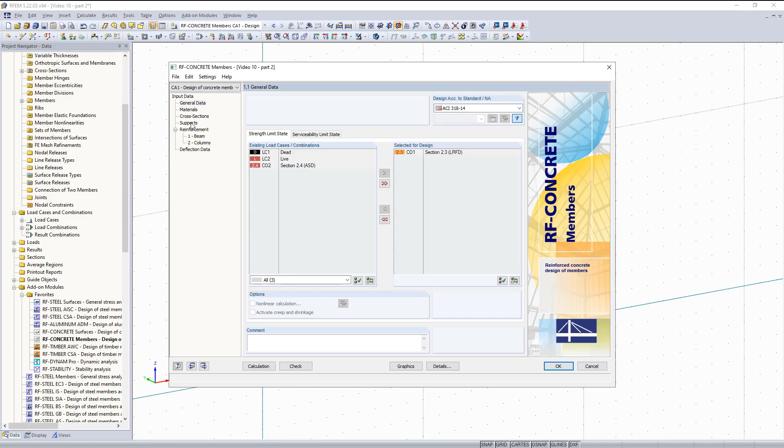Next, since we already entered all of the input data in the first part, we can proceed with calculating our reinforcement. Now all this calculation is doing is pulling the internal forces from RFEM into the add-on module and applying the ACI equations to give us our actual reinforcement layout details for each member. You can also see it solves pretty quickly.

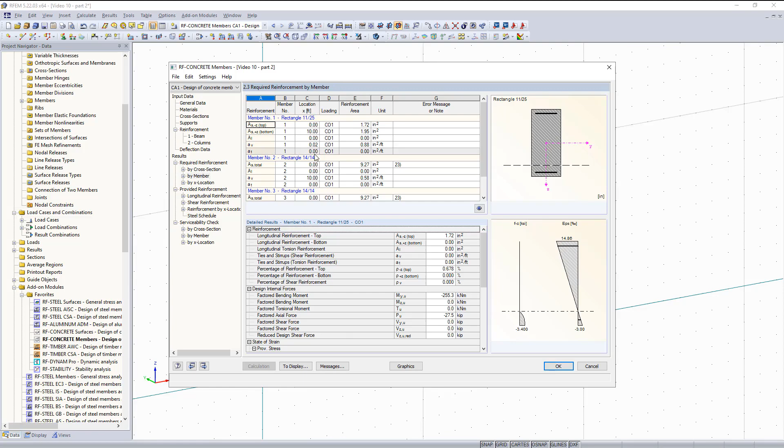So now you can see our results are presented to us in table format. You can see the required reinforcement is given to us first. Instead of looking at this by cross-section, we can also look at this per member. Like I mentioned in the previous video, you can see the tables are synced up in the background with RFEM. So you can see where we are in the structure when selecting our members.

The first member we will take a look at is our beam member, member number 1. You can see we show you the required reinforcement for the top, bottom, and shear. All those details can be found down below in the table here.

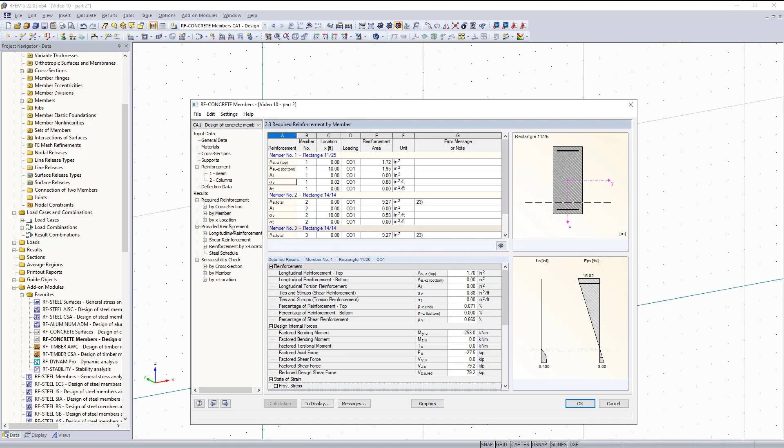In general, the required reinforcement is handy to know, but what might be a lot more meaningful is what rebar size did the program lay out for these particular members. For this information, we can move on to the provided reinforcement tables and view what reinforcement the program is providing for those same members.

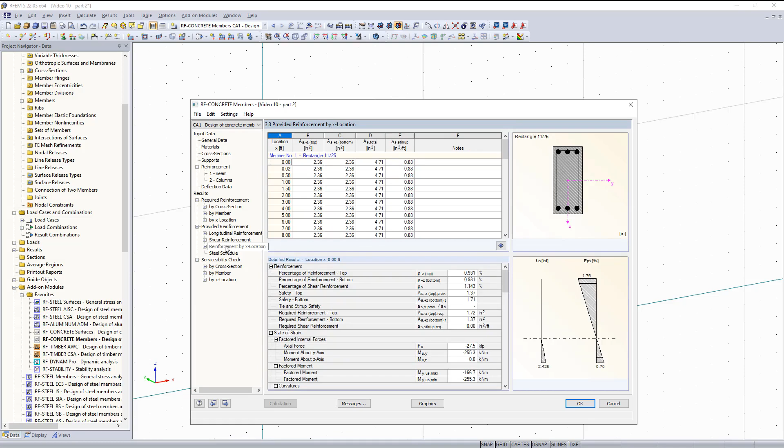You can see reinforcement is separated by longitudinal, shear reinforcement, and then the location. We can zoom in and see the longitudinal reinforcement at the top of our beam in this graphic down here. And then we can also view the surrounding longitudinal reinforcement for our columns along with tie and shear reinforcement.

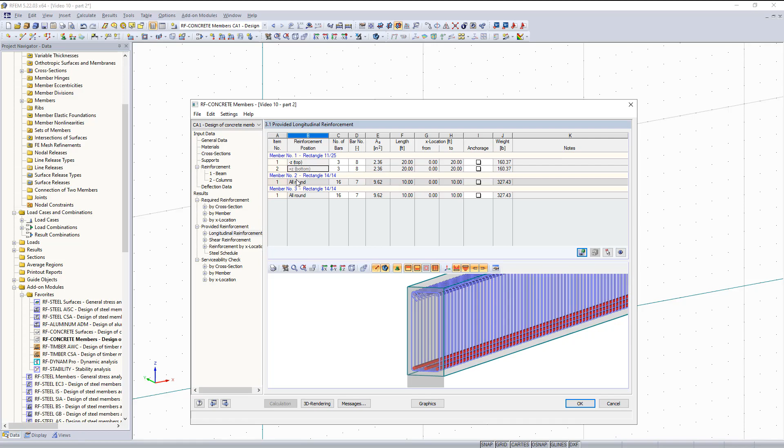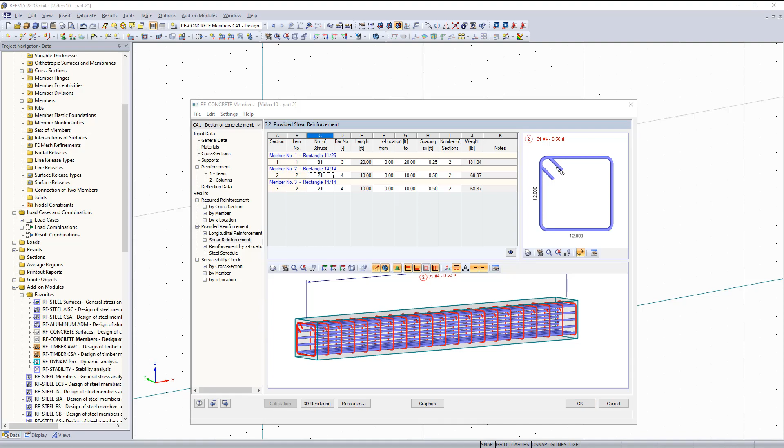Here you can see the provided stirrups for our column is 21 number 4 bars at 1/2 foot spacing on center. With these 3D drawings, you have the ability to double-click on them and get a full screen rendering on the longitudinal bars and ties.

With this 3D rendering, you have the option to make changes to your reinforcement without having to go back to your input data. This can be done by double-clicking on the callouts for either the longitudinal or shear reinforcement. Here you can change bar size along with spacing.

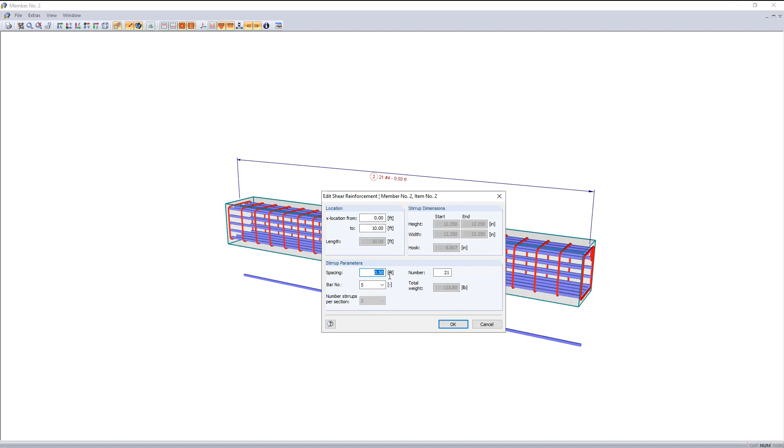So for example, if I wanted to increase these bars to number 5 and increase the spacing to 0.6, I can do that. Then you will see in the picture this will change, and then when I go back into the tables, the program will recognize this and ask me to recalculate based on the ACI standard. Now you will see this reflected in the tables.

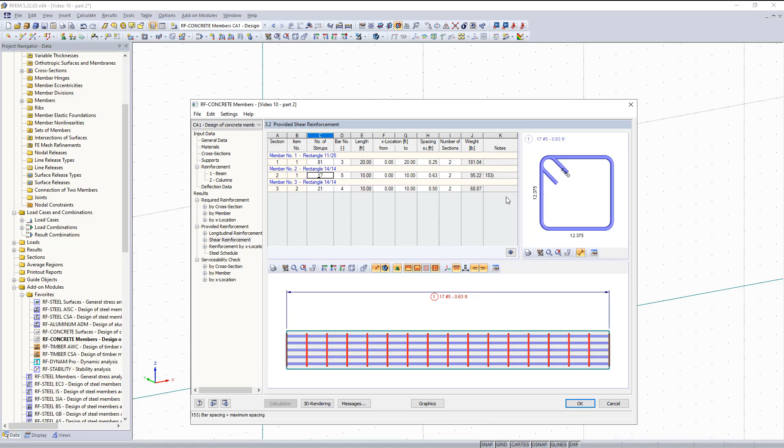Lastly, you can see we can check our serviceability checks down here on the left-hand side. If you watched part 1, you should remember that we are checking for deflection, spacing, and crack width. So altogether, we are getting a design ratio here for our different cross-sections and members.

You can see down here that I changed the crack width, for example, for member number 3 to 0.004. You can see that the existing value is 0.007, so we are over, which this capacity ratio will tell you. You can see also down here in this message, crack width is greater than crack width limit.

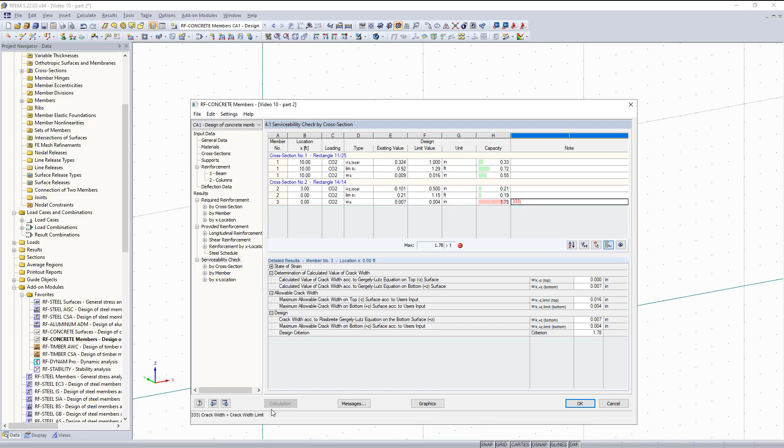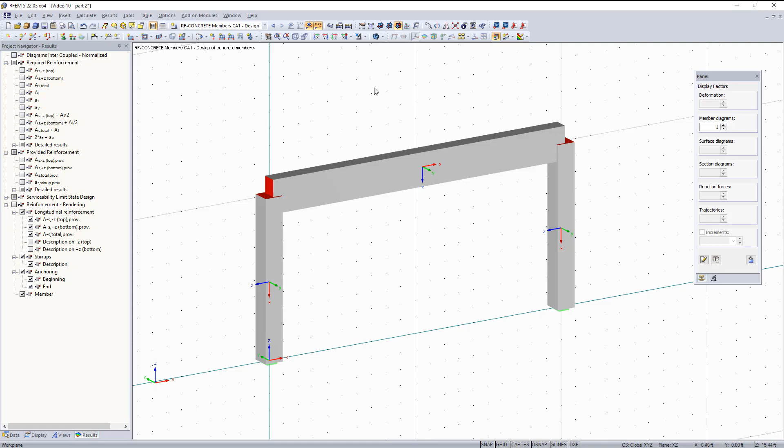Another great way to get another view of what's going on besides the tables is graphically back in RFEM. So we can click on the graphics button down at the bottom, and this will take us back into RFEM where we can view the results graphically. So you can see in the drop-down menu we are still technically in RF-CONCRETE members. Now we can select our beam member, and we can choose visibility by selected objects.

Now over here on the left-hand side, we can display a diagram of the required reinforcement for the bottom. You can see that in the middle of our member, we need a higher amount of reinforcement because of the higher moment.

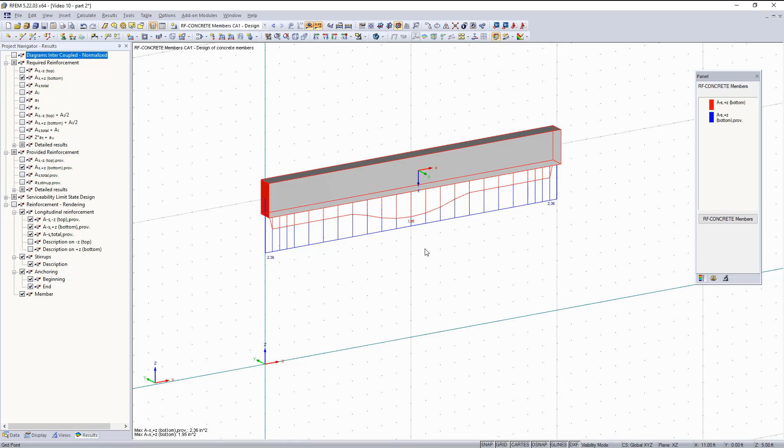And now we can do something pretty useful, which is down over here, we can overlay the provided reinforcement so we can visually see what the program has put into the beam member. This comes out to 2.36 inches squared of steel reinforcement. So this should always show that the provided reinforcement is greater than the required reinforcement, which you can see with this diagram here.

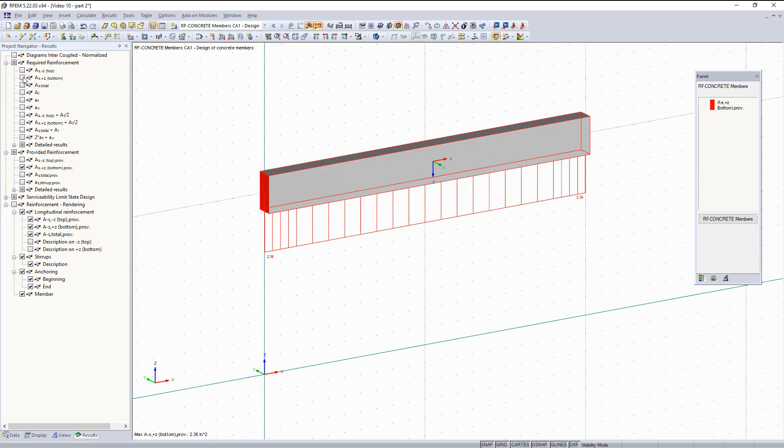Another benefit of viewing the results graphically is you can turn on the rendering of the ties and longitudinal reinforcement directly in the model. You can see the shear spacing zones as well. Any of this can be added also to the printout report.

I can turn off my visibility, and now you can also see the reinforcement for our columns as well. Like I said, any of this can be added to the printout report to see how the rebar reinforcement should be laid out.

And so that concludes the results with the RF-CONCRETE members module and both parts on how to design concrete beams and columns in RFEM according to the ACI standard.